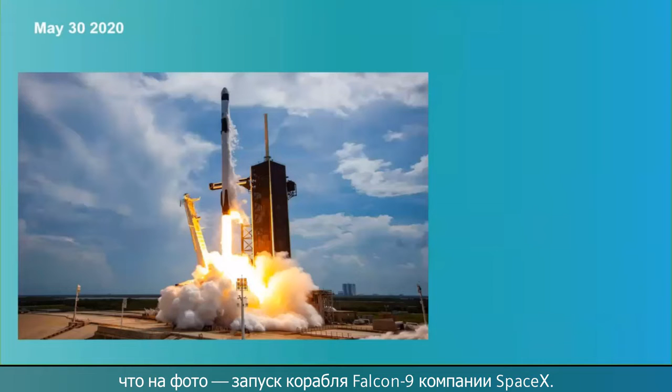Welcome to this live webinar where we will look into technologies for safe and efficient spacecraft integration and qualification testing. Let me start with an exciting date, May 30 this year. Probably many of you will remember this date and recognize on the picture the Falcon 9 launcher of SpaceX. It was a special day in the sense that it was the first time in history that astronauts were launched towards the International Space Station on a commercial spaceship.

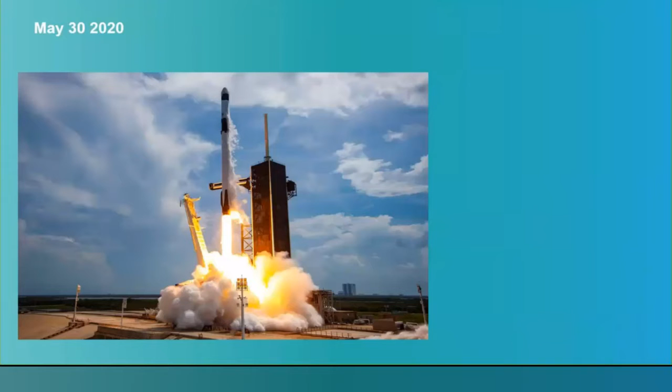The first 12 minutes of the launch and the final safe release of the Crew Dragon capsule in orbit were probably the most exciting and at the same time stressful moments because a lot could have gone wrong during that short period of time. In fact, this concern applies to any space mission, and that is what we will talk about in this presentation. During the takeoff and the first couple of minutes, the spacecraft is exposed to an extremely harsh environment, causing extreme levels of vibrations and shocks that can lead to damage of the payload or even the entire spacecraft. So therefore, ensuring launch survivability through qualification testing is really crucial and mandatory.

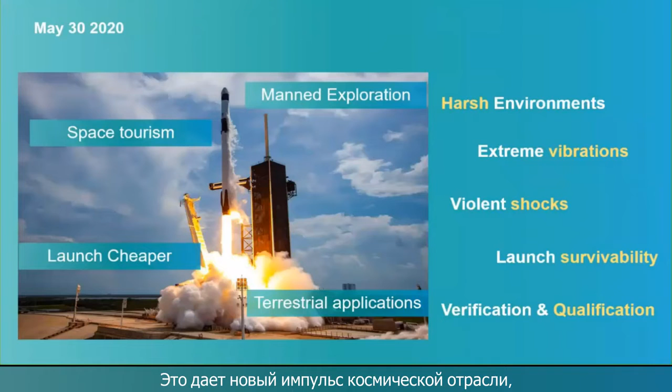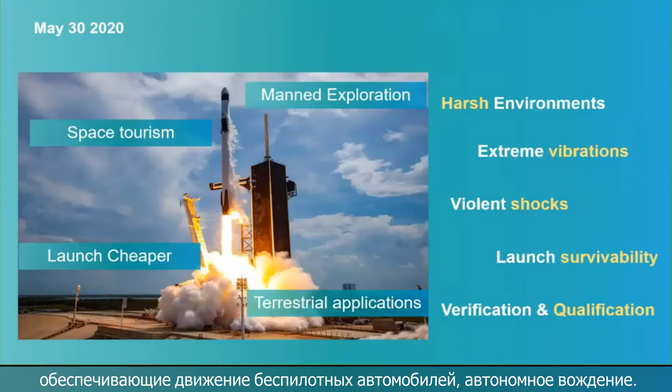Before we continue, I want to highlight some trends we see in the space industry. The number of space missions will only increase in the future. Today, we already see a space race between the traditional space agencies and many newcomers. This creates a new momentum in the space industry, which drives manned explorations to the moon or Mars. Also, investigations to make launching of satellites much cheaper. Also, space tourism is getting more and more attention. And of course, terrestrial applications where systems need to be put in orbit in order to support, for example, autonomous driving and so on.

Here we see the flight profile of a launch vehicle with the various phases during the launch. In each phase, the passenger satellite is exposed to a very specific, extremely harsh environment, leading to extreme levels of vibrations. Throughout the launch, the vibrations are structure-borne and airborne in nature. After liftoff and before deployment in orbit, there are also a series of violent shocks, like, for example, the stage separations, pyro bolts, and ultimately also the release to orbit. And all these shocks put the satellite under a lot of structural stress. Once in orbit, then life is a lot quieter, of course.

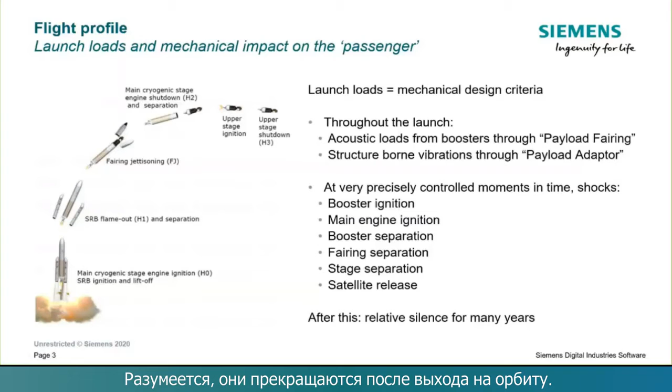Therefore, launch vehicle authorities impose strict mechanical qualification testing that represent real launch conditions for each component as well as for the assembled satellite before it can take a flight on their launcher. All the requirements are described in a launcher's user manual. Here you see the specs of the Soyuz launch vehicle. They impose sine, random, acoustic, and shock tests and ask for proof of those tests. They are often also present during the testing.

Challenges are that those tests happen on the actual spacecraft, so there is a significant risk of damaging the hardware. And that is one of the key messages in qualification testing, namely how to perform a successful qualification testing without damaging the spacecraft. Because if you damage the spacecraft, it will introduce delays, costs, and so on. So testing software and hardware really need to be designed in such a way that it can perform qualification testing with full confidence.

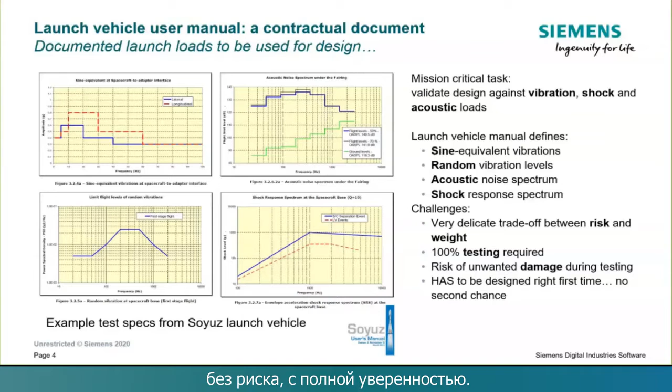So in this presentation, I will focus on the following topics. I will first talk about qualification, let's say the different types of qualification testing. Then I will introduce some smart innovations, and later on I will also talk about some engineering tools that can bring insights. And at the end, we will have Mr. Podar from Airbus, who will present some of the Simcenter applications in their qualification testing.

So, space hardware mechanical testing covers, in fact, a wide frequency range involving many different test types and different test infrastructures: shakers, slip tables, reverberant rooms, speaker setups, drop tables, pyro shock test benches, and so on. So the nature of those tests is quite different. This presents some challenges. First of all, it's a challenge for the test team, as they typically have to master as much as possible of all the tasks at hand.

Another challenge is to keep the hardware and software investments under control for all those test setups. Each test setup, namely, has a specific set of requirements when it comes to data acquisition and analysis. So we will see in the upcoming slides how Simcenter solutions cover all these requirements in a uniform platform.

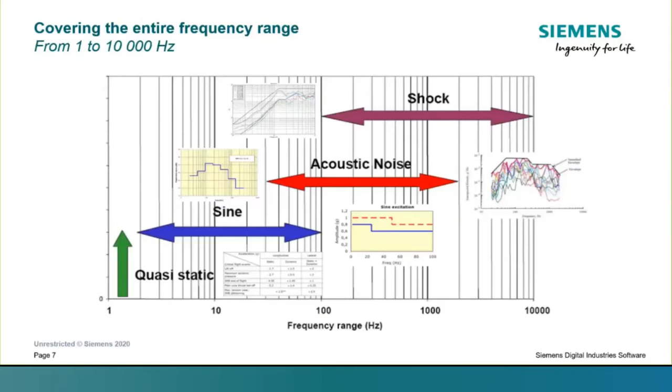A satellite vibration test consists of reproducing the vibration levels described in the launch vehicle manual on a shaker. The control system drives this installation, taking the levels at the interface points into account, closing the loop in real time. At the same time, response levels are being monitored and checked against auxiliary not-to-exceed levels or maximum levels. If those responses are exceeding the prescribed level, the control system will reduce the drive level to protect the instruments. This process we call notching for sine sweep testing, for example, and response limiting for random excitation testing.

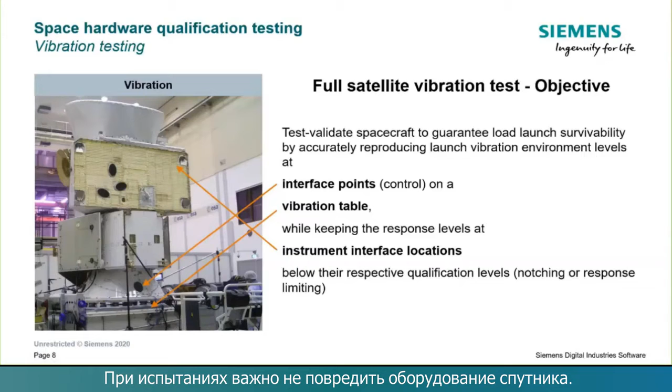And then on top you have another module, a propulsion module, which will in fact drive the two satellites to Mercury. So you see, satellites can be quite complex. Like here, you have a satellite stack, and you have to ensure that when you test the satellite, you do not damage any sensitive instrument or damage the integrity of the whole equipment.

As I said, spacecraft are getting larger and more complex. This triggers the need for higher channel count systems for extra protection and better understanding of the spacecraft dynamics. To allow large configurations without overloading the control system, we designed reduction systems. Those are extensions to the control system, fully synchronized to it. They acquire and store the raw time data, but in parallel also process the data in real time to spectra or FRFs and so on. This processing is controlled by the synchronization channels generated by the control system.

This setup allows the control system to focus on safety-critical control and notching tasks, while the reduction system can acquire all the remaining channels. The setup that you see here in the middle is in fact the setup at ESA ESTEC, where they have been using 60 control channels and, I think, 500 or 600 channels or more for reduction. Good.

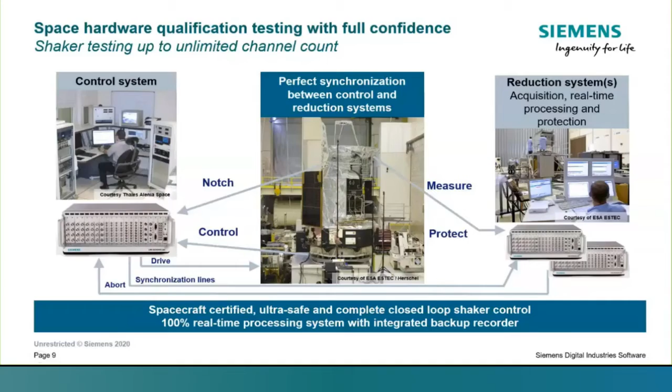In order for the vibration test team to define the qualification test with maximum confidence and ensure the space hardware will not be damaged during the test, a notching and limiting prediction application has been developed. This tool predicts what the spacecraft will endure during the test. This prediction uses data from the control and one or more reduction system channels. The prediction can be done using data from a low level run or from a self-check run, and is then extrapolated to higher excitation levels.

So it enables a full simulation of a test run, providing maximum protection. It allows, in fact, offline limiting, embedding the linearly extrapolated levels in the reference spectrum, while still keeping the limiting profiles active for additional protection, especially when you have non-linearities, which of course are not taken into account in this offline limiting estimation. These channels can then still protect the spacecraft.

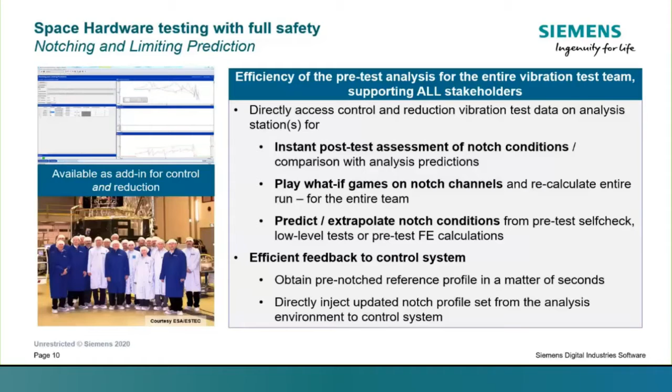For lateral tests on spacecraft, slip tables are commonly used. Those tables are designed to be uniform, having the same acceleration level regardless of the position on the table. This only holds up to a certain maximum frequency, above which the table acts as a dynamic system. Labs are often forced to use the table above this frequency because there is simply no alternative. It is thus important to properly understand the table dynamics when designing the test setup.

Tables have resonances and anti-resonances, so knowing those and the associated mode shapes is important when selecting the location of the control accelerometers and defining frequency-dependent contribution profiles for the control sensors. In this example, a setup was used with 13 accelerometers, and an operational deflection shape analysis and operational modal analysis were performed to investigate the dynamics of this shaker table.

So I have put here two mode shapes of this table. The first flexible mode was around 570 hertz, which means we have to be careful if our frequency range of interest is above this frequency. Also, in this first flexible mode, you see that one point is really acting as a nodal point. So it is dangerous if you put a control channel there, because that will then not really give the right information to the control algorithm.

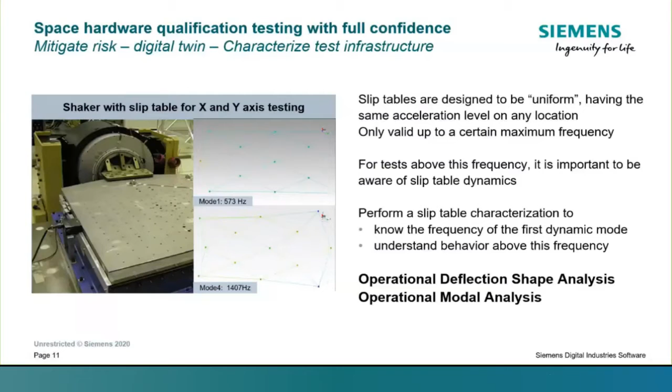To mitigate risk of failure during deployment and conduct successful qualification tests, simulations are used to study the dynamic behavior of satellites. NX Nastran and SimCenter Structural Dynamics, for example, have traditionally a wide customer base in aerospace and defense. Here I'm showing you an example of Lockheed Martin Space System, where they use this simulation for coupled load analysis and the study of the dynamic behavior of a satellite and its solar panels upon launch and deployment.

Interesting here is that a unique feature to SimCenter Nastran is the ability to create external super elements with mode acceleration output transformation matrices, which are required for coupled loads analysis.

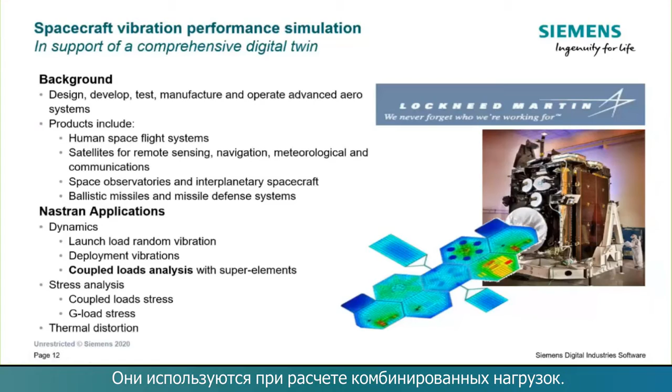The system that I just described for vibration testing can in fact also be used for acoustic qualification testing, using the same hardware and, in fact, a similar application on the same platform for acoustic control. A satellite acoustic test consists of reproducing acoustical levels as defined in the launch vehicle manual in a reverberant room.

The control system drives the installation, taking levels measured on an array of microphones into account, closing the loop in real time. At the same time, response levels are being monitored. Those responses are typically accelerations or strain levels. Typically, up to 60 microphones are used for control, and on a large and complex spacecraft, 500 to 700 channels are measured on a reduction system.

Some of those channels are also used for protection of sensitive hardware, and if those responses exceed the prescribed level, the reduction system can be set up to abort the test, for example.

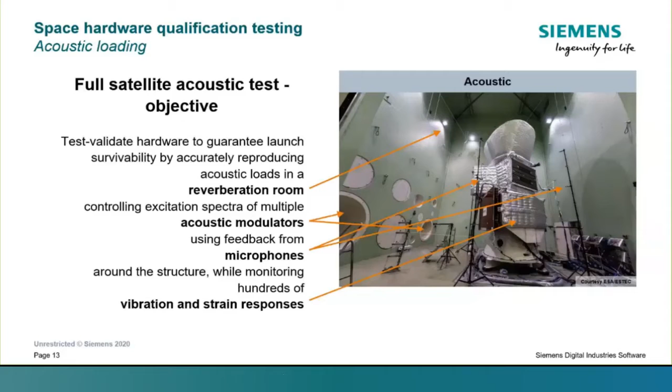So SimCenter testing solutions allow performing such acoustic qualification testing in a reverberant room with full confidence. It offers safe, traceable, efficient, and smart control capabilities to ensure protection of the hardware and reaching the desired third octave acoustic profile.

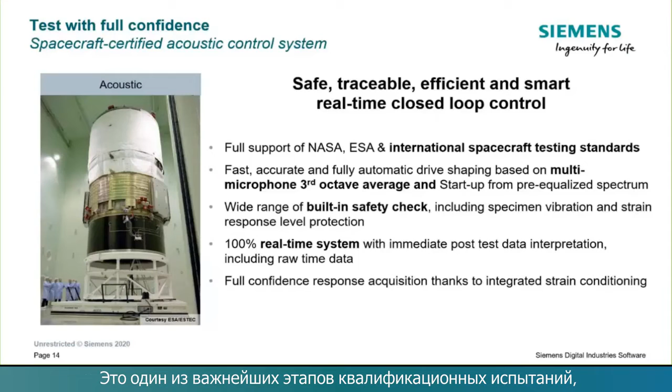What is also crucial in all these different qualification tests is the self-check test. The self-check test is a low-level test conducted prior to the full-level test in order to verify the closed-loop condition, to predict some full-level responses, and also to see where limiting is required. So that is really one of the crucial steps in a qualification test. But we will talk about that later on in the presentation.

The SimCenter SCADAS lab hardware and Test Lab software can also be used to acquire and analyze shocks. It allows a safe reproduction of a wide range of shocks on shakers and provides all necessary processing capabilities, such as online calculation of shock response spectra and SRS limiting for specimen protection.

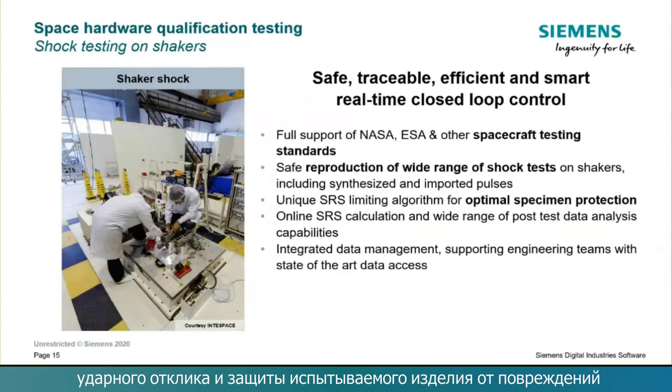Okay, so shocks are also often reproduced using pyrotechnic devices instead of shakers. Spacecraft separation mechanisms use pyro devices, causing a high-level shock, which propagates through the entire spacecraft.

The primary purpose of the test is, of course, validating that the separation mechanism works as designed. It is, however, also important to study the impact of this shock on the instruments on board the spacecraft. For that purpose, acceleration levels throughout the spacecraft are measured during the test.

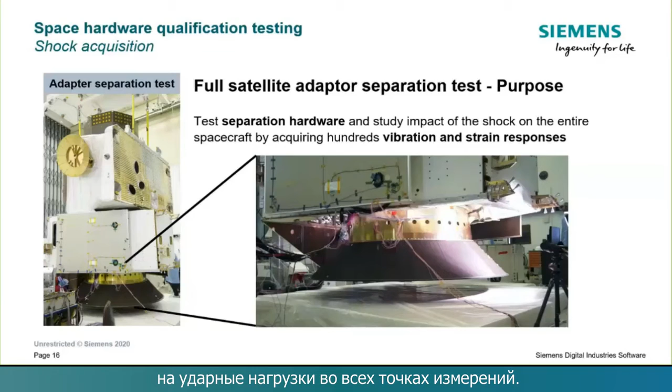Typical analysis results are shock response spectra for each of the measurement locations. So this brings me to the next chapter, where I will introduce some smart innovations.

Spacecraft acoustic testing is typically performed in a reverberant room, using high-power acoustic modulators to reach the extreme large acoustic levels. But in fact, it can also be done in a non-reverberant room, using conventional loudspeakers. And that is, of course, very interesting because that could be a cheaper alternative, since there is no need for building a reverberant room.

That means lower construction costs, lower operating costs. And it also offers the advantage that you don't have to transport your test specimen to a dedicated laboratory to perform the acoustic test, so it reduces the risk of damaging the structure during transportation.

The technique that is used is called direct field acoustic noise testing, and it requires a multiple input, multiple output, narrow band control technique to ensure the acoustic field is uniform.

So here in this example, you see a setup of a satellite component, and the instrumentation used during such a test includes microphones for control and a set of additional microphones for acoustic field uniformity check.

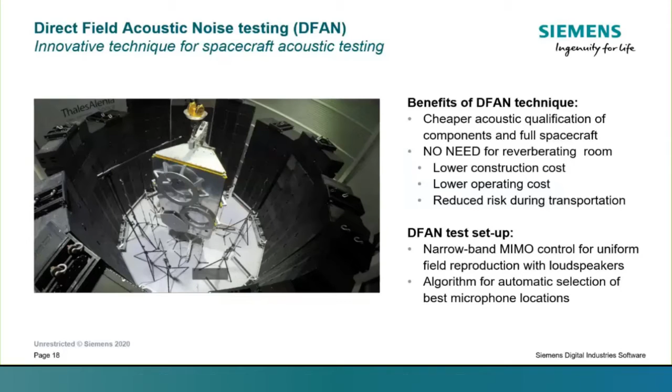In preparation of the actual direct field acoustic noise test, a virtual direct field acoustic test can be executed to design and optimize the test setup and perform the acoustic test virtually. In this example, the target setup is the DFAN test on a reflector of an antenna.

In preparation of this test, the setup was designed in SimCenter 3D, including the arrangement of the speakers and the position of the microphone and the test specimen. Then the performance has been predicted, including the uniformity of the acoustic field.

Finally, calculations on the test specimen itself have also been done, to calculate the acoustical induced loads on the test item.

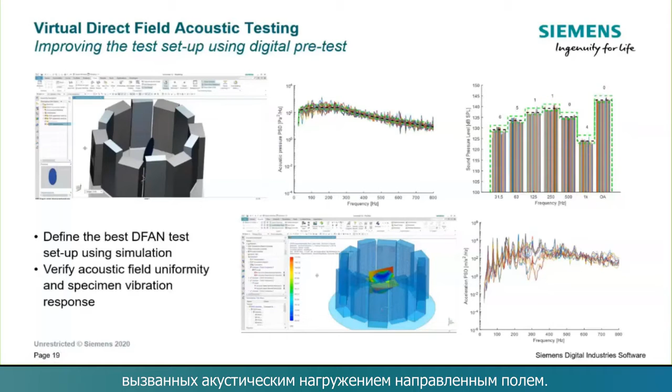As I said, SimCenter SCADAS is used as hardware to generate the control signal to the shakers and for the acquisition of the data from all the sensors on the spacecraft. So we continuously innovate also our hardware.

Additionally, the module also has an output connection, allowing you to record the input channels on a recorder or on a reduction system, again adding redundancy for the confidence of the test. A very nice and powerful module, which in fact combines robustness, redundancy, and flexibility.

I will talk about virtual shaker testing now. Virtual shaker tests can help predict major issues that might occur during the physical test, such as unacceptable high vibration accelerations that may occur and damage the satellite or expensive and sensitive instruments on that satellite.

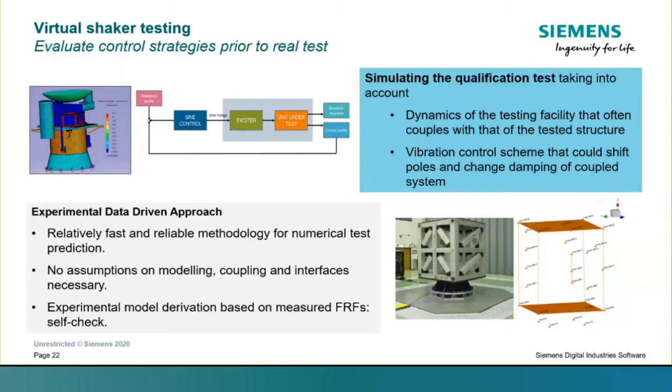Good. Let's now move to the next topic, so engineering insights.

To really understand the structural dynamics of a spacecraft, the program sometimes requires a dedicated test like a modal survey test. This test aims at validating the spacecraft FE structural dynamic model.

This model is necessary for the launcher coupled loads analysis process, which assesses the risk of launch load damage. The same model can also be used to de-risk qualification testing, predicting spacecraft response to the loads injected during the test, which corresponds with the virtual shaker testing I talked about in the previous slide.

Such modal survey tests consist of exciting the structure with electrodynamic shakers and measuring the responses with accelerometers, and then applying modal parameter estimation algorithms to derive the modal parameters.

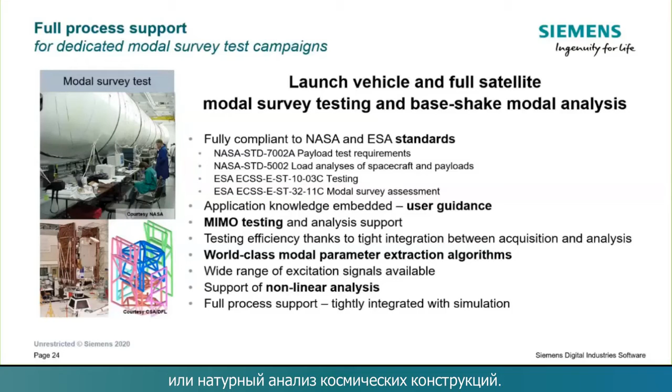It also allows you to perform nonlinear analysis, for example by applying a sine or sine-sweep type of excitation. So SimCenter fully supports this process and provides all necessary capabilities for performing virtual or physical modal analysis of space structures. Let's illustrate this with an example of a program where such a modal survey test was recommended.

It was for the RadarSat, a Canadian Space Agency project. The coupled loads analysis conducted on this satellite revealed that damage during launch could occur on the radar panels. This satellite has 4 radar panels with almost identical geometry, stacked closely together in launch configuration. An in-depth and accurate identification of the resonance frequency was required to calibrate the FE models.

As a result of the high modal density, the test conducted here required 5 simultaneous shakers and a total of 240 responses to isolate all the modes.

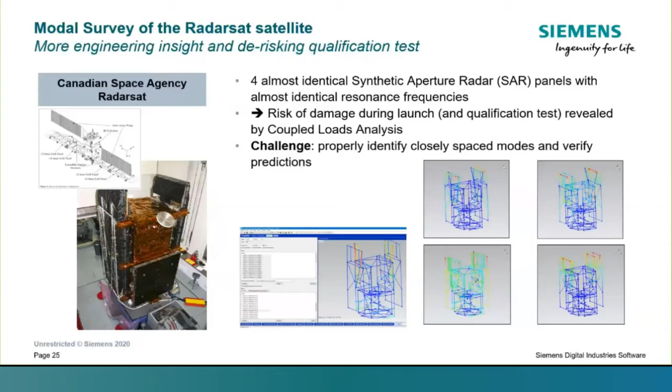As we have seen before, an acoustic test can also be done using conventional speakers. We call this the DFAN method. Here you see a setup on a satellite component, the reflector of a downlink antenna.

Instrumentation used during such a test includes microphones for control, and a set of additional microphones for acoustic field uniformity check. But we also measure additional responses like accelerometers and sometimes strain gauges. Traditionally, those accelerometer and strain signals are processed towards PSDs to get an idea about the acoustically-induced loads.

But you can also use them to gain more engineering insight. For example, you can use operational modal analysis to extract the modal parameters from the accelerometer data, giving you an idea of the resonances, the mode shapes, and the damping, which is interesting information.

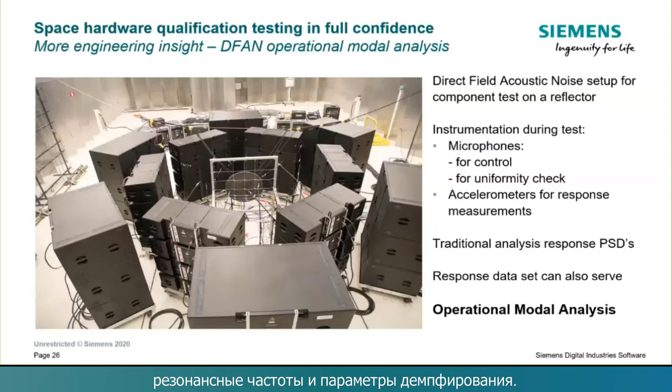Another interesting application is satellite micro vibrations. High-end optical imaging sensors and lasers are used more and more in satellites. These sensors have high requirements in terms of stability to provide high-quality images.

Mechanical devices on the spacecraft, such as reaction wheels for attitude control, can cause vibrations leading to blurring of images. These issues need to be solved by understanding the vibration energy generated by these devices, and by looking at possibilities to reduce the energy transfer to the sensitive equipment.

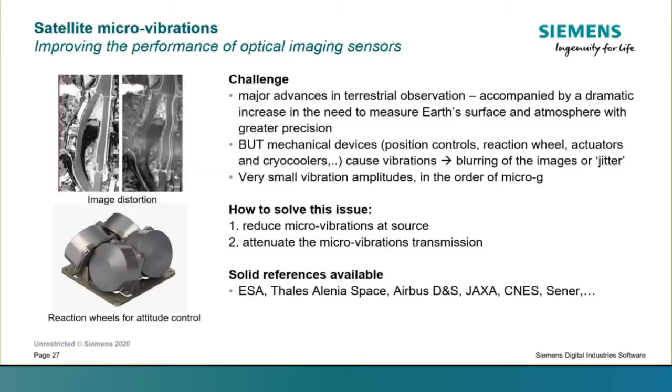They have a dedicated test where they measure the vibration and loads generated by the flywheel on this setup. The setup has been mounted on a granite table, because the levels measured are so low that there is a need to isolate the test rig from ambient noise and vibrations.

The Simcenter SCADAS hardware is ideally suited for this kind of measurement because it has an ultra-low noise floor, allowing accurate measurement of low-level vibrations.

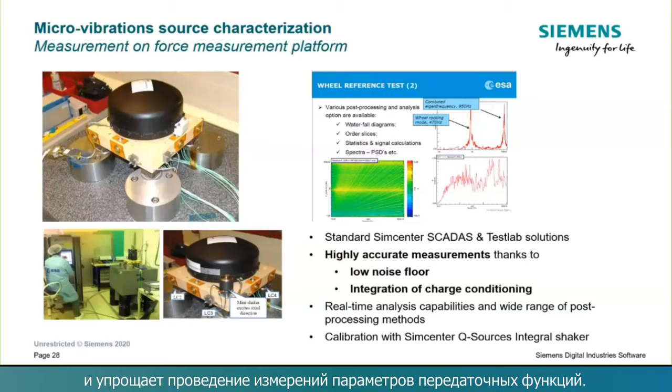Okay, so this brings me to the first part of this presentation. Sarah, I will now pass the word to Mr. Podar for his part, where he will talk about the application of SimCenter in his facility.

So hello to everyone. I'm Mr. Podar. I'm leading mechanical test and vibration test, acoustic test, and also physical measurement in Airbus Defence and Space Toulouse. So I will make a short presentation of the applications that we have in Airbus Defence and Space for using the software of SimCenter and also the hardware and all the applications that we have.

So shortly, I will present the Airbus Defence and Space business. Some people know that we are the first company in Europe for satellite coverage. We provide telecommunications spacecraft for other countries and Earth observation spacecraft for the pictures and so on. We provide also navigation spacecraft, orbital space exploration for science missions, like dark matter with Euclid. We have also the rover ExoMars, but we have some delay with COVID, but it will be launched in 2022, I think. And we also provide a full solution for satellite testing.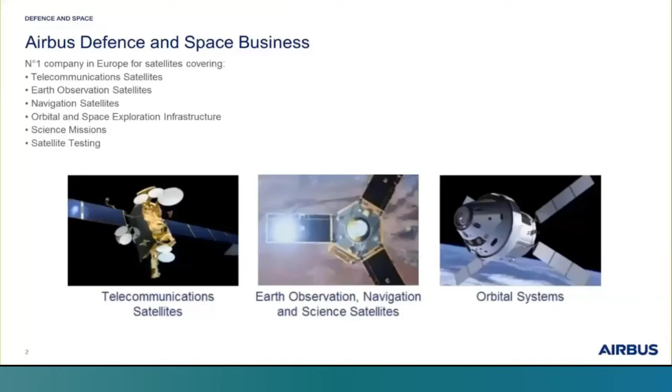So here I'm in Airbus Defence and Space environmental testing in the Toulouse premises. ADS Toulouse is the European leading test space center. It was formerly Intespace, for all people who knew it before, but now we are Airbus Defence and Space. It is one of the 4 European test centers coordinated and approved by ESA to carry out test services to the benefit of large international industries in the space domain.

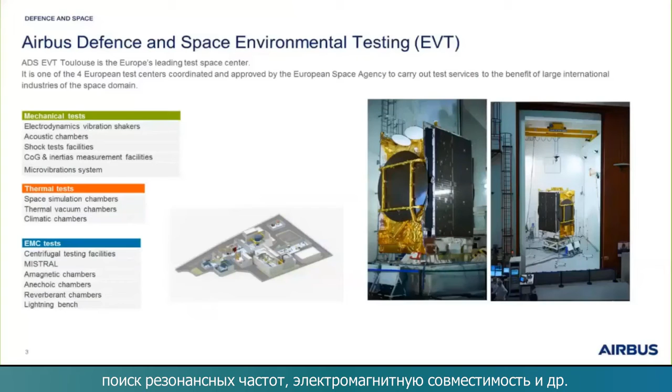So if you give us a spacecraft, we can arrange to do the full test campaign: the mechanical test with shaker, acoustic, shock test facility, drop test, the physical measurement, and we can also carry the thermal test and the EMC with anechoic chamber, amagnetic chamber, and so on.

So in this slide, I will show you all the applications that we have with the hardware of SimCenter and how it helps us to carry out all the tests. So you can see the tests that we can carry with SimCenter: vibration test, acoustic test, acquisition test, microvibration, and FMD. I will explain it later. We use these modules to carry out the test: sine control, random control, shock control. We have 4 shakers in the test facility. Each test facility uses the software of SimCenter and the hardware also.

So we can carry from small subsystems to huge spacecraft, because with this shaker we can put a spacecraft of 7 or 8 tons maximum on the shaker. So it's a huge spacecraft with a high effective mass on the first mode. So we can carry all the tests for solar arrays, everything, reaction wheels, subsystems for space agencies, and so on. After the vibration test, we can carry the acoustic test. So we measure with microphones and all the accelerometers on the spacecraft.

We can also make the acquisition test with the transient capture mode from the SimCenter software. We can carry the clamp band release. For the clamp band release, we need to check with the launcher that the clamp between the adapter of the launcher and the spacecraft will be released correctly, and we measure the pyrotechnic shock with LMS software, the SimCenter software. We also carry the solar array deployment in order to check that the solar array will deploy correctly in space. It's better.

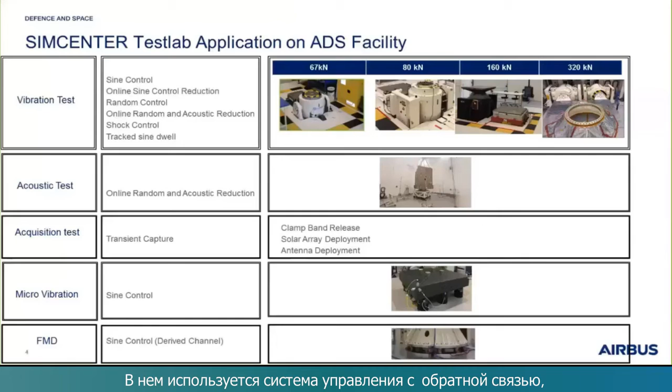In our parameters, we have park homogeneity. We have made the choice of homogeneity of the EVT park. We use a SCADAS lab on each test facility for high flexibility for our customers. We choose the configuration with customer requirements. Does it need notching on strain gauges? How many channels are requested? How many load cells are needed? SimCenter has developed the VCF card for us, and it's very robust and also highly flexible because you don't need to make the difference between charge or ICP channel. You can easily set channels separately if you have one loop on one channel.

You can see in this example that you can have high flexibility, because you can make just one test with just a piloting system and few channels, but you can add the strain gauges acquisition, and you can notch on these strain gauges, or you may want another system with a high number of channels. So the maximum that we can carry on those facilities is 500 channels on the acquisition system and 100 channels on the piloting. So we have two systems.

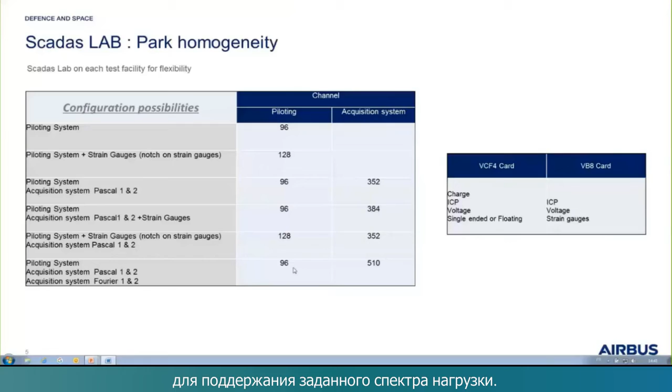I don't know if you know this kind of system well. There is one for the piloting system. We put the pilots and the control pilots on this system, and also the notch channels. On the acquisition system, they will have all the channels of the spacecraft. All the channels of the spacecraft are taken with the acquisition system with the VCF card, and we have a recopy of these channels, and we choose some critical channels we put on the piloting system, and that's how we carry out all the tests in our premises.

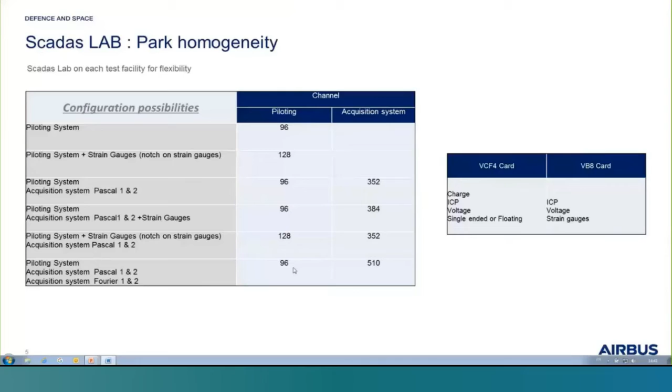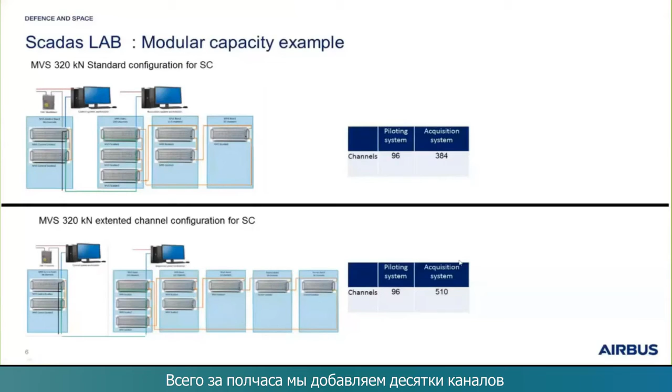So this is the modular capacity example. It takes just 1 hour, maybe less, to pass to one configuration. That is a standard configuration for a spacecraft with this number of channels, and you just need to put a mobile acquisition system that we have, because we have all the same SCADAS labs, and if we want to add some SCADAS labs, we just need to connect them with optical fiber, and in half an hour you can add a lot of channels to your acquisition system. So this is the thing that we need.

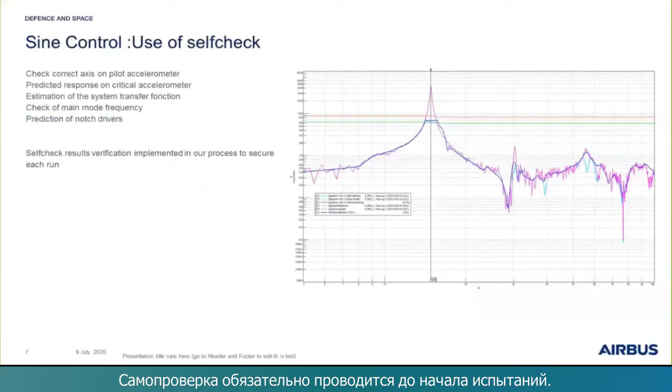I will explain now a utilization of the sine control. I will explain the self-check, because for us it is half of the test, because we need to guarantee before the test that all the security will be okay and all the channels will be okay. So with the self-check, you can check the correct axis on the pilot accelerometer and the predicted response on critical accelerometers. You have the estimation of the system transfer function, and you can check with high precision that the main mode of the spacecraft will be okay, and you can also have the prediction of notch driver.

In this example, I have superposed a pink curve and a blue curve. The blue curve is the test run that we have passed, and the pink curve is the self-check we performed before the test. So you can see here that they are very near, and for us, we have a lot of information just with the self-check. We can check that the main mode is where we predicted, so that's the first information.

You can check that you have the correct level at low frequency, so you don't put a channel on the wrong side, and you can check that the notch channel is the correct one, and whether this channel will take the hand during the test. You can check that for this one, this is the main mode, so this will take the hand here, but you can see that another notch will take the hand at another frequency.

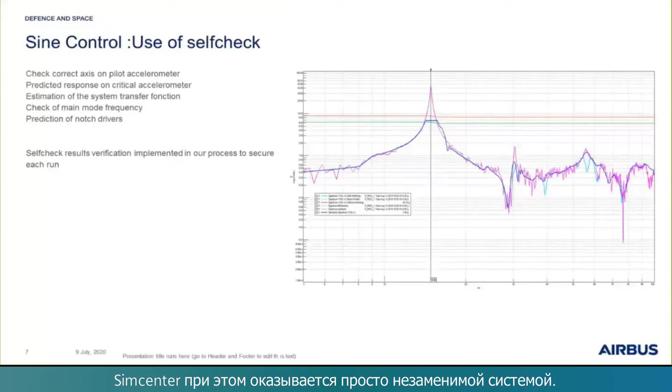I will explain another thing: the control spectrum main mode with automatic notching, because this is always a discussion between the customer, the launcher, and also the mechanical architect. The discussion is about qualifying in terms of effort and moment, and seeing if the spacecraft will handle the launch. The architect wants to protect the structure and also the sub-equipment, but the launcher wants to pass a lot of moment. So we need to have a long discussion.

So you have two ways to do this. You can manually decrease the input, but you need to do the calculation, and if there is some mistake, you don't have protection. The second way is to use the automatic notching. So you can see that we can perfectly control the input of the mode. If you understand the compression factor in the software and the number of periods, you can control the overshoot. You have in green the reference and in red the abort. You can control the overshoot, and you can also control the instability after the main mode.

You need to know that for a main mode of spacecraft, it's like 4 or 3 tons on the effective mass, with a Q factor of 30. So it's better to control it with a lot of safety, and the automatic notching is working very well if you understand how the compression factor is working and the number of periods. But you need to understand how your shaker is working, and you need to know well the finite element model of your spacecraft.

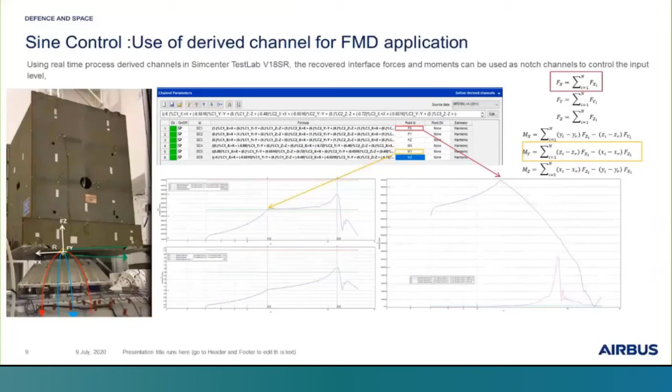I will take an example: the Meteosat spacecraft will be the next spacecraft for weather forecast prediction. We have two pieces of equipment with a rotating wheel, and we need to know if one wheel will have an effort on the other wheel on the spacecraft. So we need to check it with emissivity testing, and we use this application of sine control in the range of 0.1 Hertz, and you see that the effort and the moment are very, very low. So we use Simcenter to carry out this test.

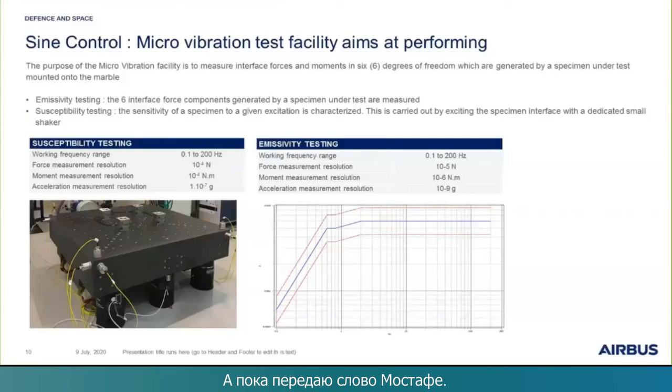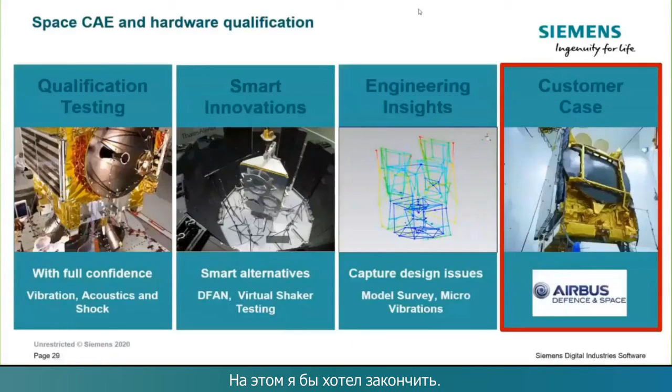So voilà. These are all the applications that we use in our premises with the Simcenter software and hardware. So thank you, and if you have a question, I will pass the hand to Mostafa. Okay, thank you for the nice presentation on some functionalities in Simcenter. I had incorporated your presentation in mine, but this is the final slide I want to end with.

So to summarize, the Simcenter Testlab and SCADAS solutions consist of a complete solution for mechanical qualification testing with vibration, acoustic, and shock excitation, as well as modal survey and microvibration testing for the space industry. The platform is designed to cover all applications in a uniform implementation, covering control, acquisition, and real-time processing. It also supports data and configuration management and easily connects to simulation models. And we use a common hardware platform for all the different types of application testing. It also combines with the Simcenter 3D capabilities for simulation of the spacecraft dynamic performance and for validation of the spacecraft digital twin or FE model.